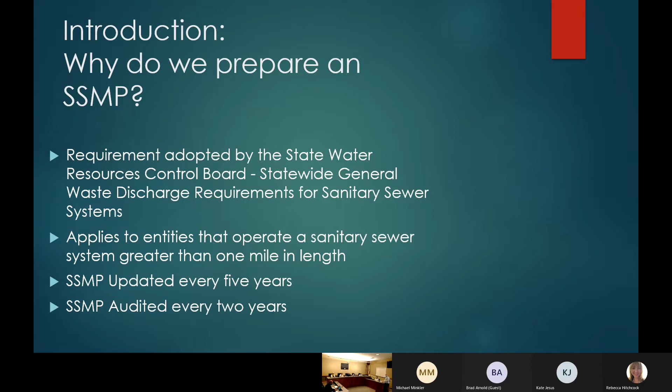Some of the processes we recently implemented and incorporated into this 2020 update were, if you could advance the next slide please, Becca. We implemented mobile MMS and updated the mission statement, the vision statement, and made all updates to incorporate the new construction maintenance manager position and all contact information for field staff and operations. We also had a new collection system supervisor during this past couple of years.

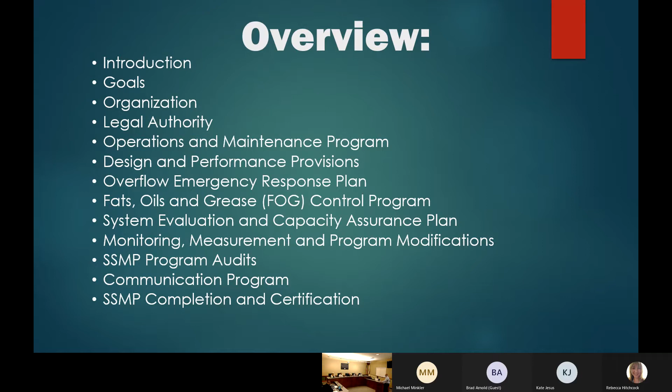If you could advance the next slide, and those are the updates. If you could advance one more. Thank you. So here's a graphic, you guys can see a couple slides into the presentation, the mobile MMS update. Now our collections crew can incorporate all of their work efforts onto a schedule in the computer maintenance management system, and it'll spit out any work orders they need to complete during the year, quarterly, monthly, and so on. There's a depiction of the collection system and the water system in mobile MMS.

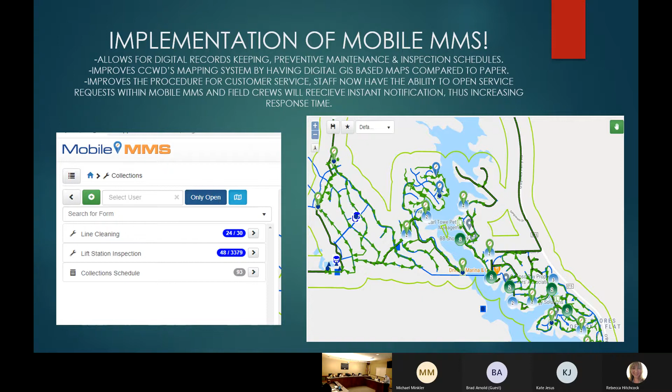And if you could advance the next slide, thank you. We also incorporated the fact that we now have 2 cleaning trailers. One's brand new, we refurbished the second. Next slide. And we also incorporated the new GapVax into the SSMP.

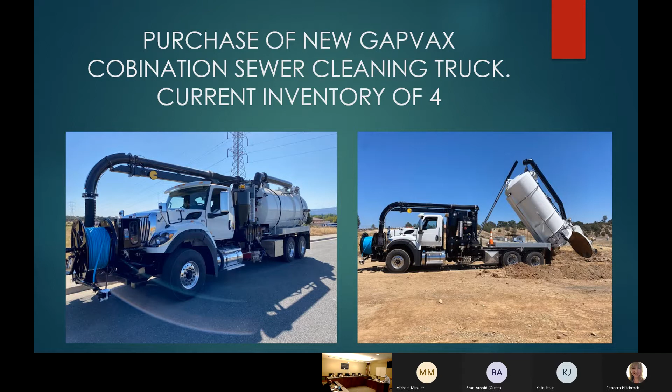And we discussed smoke testing, which you've seen some of these pictures before.

These are, if you recall, Douglas Flat Vallecito. So we push heated vegetable oil through the collection system.

And then we go find any areas of exposure where we see that there's openings into the sewage system, sources of inflow and infiltration. And then we go ahead and cap and patch those.

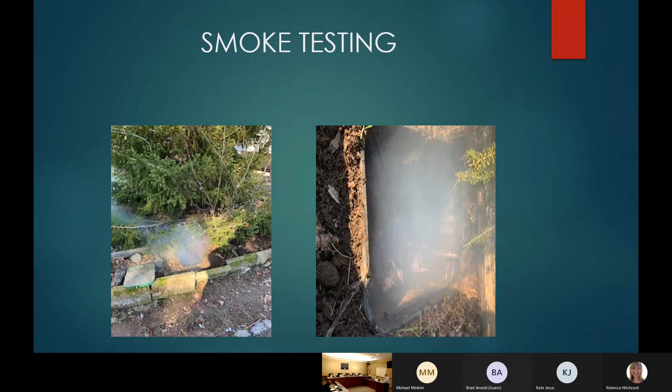It's really effective. The key to smoke testing is to have an effective public notification system ahead of time, because you can really raise a lot of flags if they see smoke coming out of the ground all over the place, right? And so this picture, I always love this one.

Picture on the left is of our collection system supervisor, Amos, holding what everybody affectionately calls a Yeti, which is a giant hairball.

That has taken the shape of a pipe and has been pulled out. So the SSMP is really designed to resolve issues like this that occur over time.

So staff's recommendation is that the board go ahead and approve this 2-year audit and update for the SSMP.

What is it called? Did you say a hairball? Well, we call it a Yeti. Yeti? Yes, YETI, correct. So when you hear the collections crew talk about all the Yetis they've pulled out of the system over the past couple weeks, now you know what they're referring to.

Oh, I think, yeah, it could be. Yeah, it could be just after lunch, you know. I'll bet it's not only hair in there.

Is there any way that, you guys are always talking about redwood tanks, maybe we could sell this for like extensions? Yeah, that's a good point. We can develop our own line of wigs. Yeah, oh yeah, there you go.

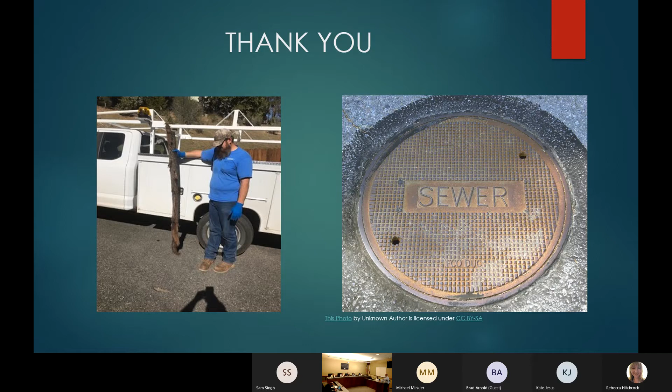Got it. Because the resale on those things can't be very good, since everybody else has the same problem with them. But if we can keep them in the yard, then maybe we can save a couple bucks. Good point. Are we banking on that money from a sale already?

Not with these 2 vehicles. They've been used quite well. Yeah, that makes sense. Got it.

All right, anything else on this item? We have a motion and a second. Is there any public comment? Okay, all those in favor state aye. Opposed? Okay, thank you. Damon.

5B, discussion and action regarding credit adjustment for APN 3510. Jessica: Good afternoon. We currently have a customer located at 5831 Highway 4 who is requesting a credit adjustment for the amount of $1,000.33, due to a leak on their property through no fault of their own. Per the district's ordinance, any leak adjustment over $1,000 requires board approval. This customer has not received an adjustment in the last 5 years and is in good standing, so we recommend that the board approves.

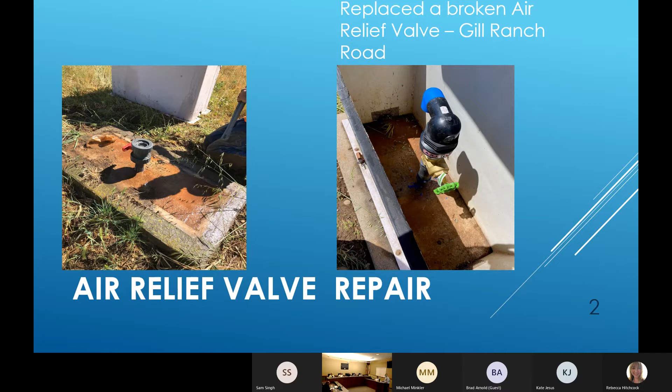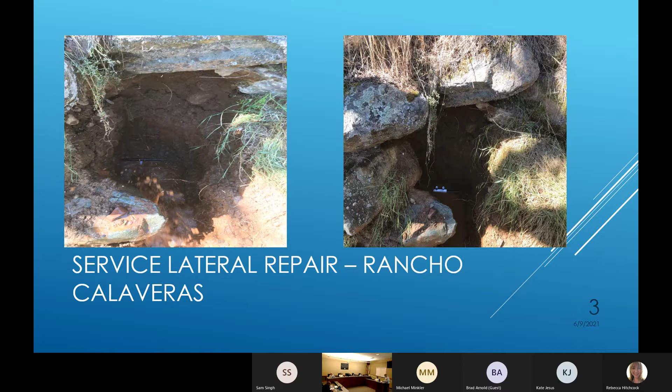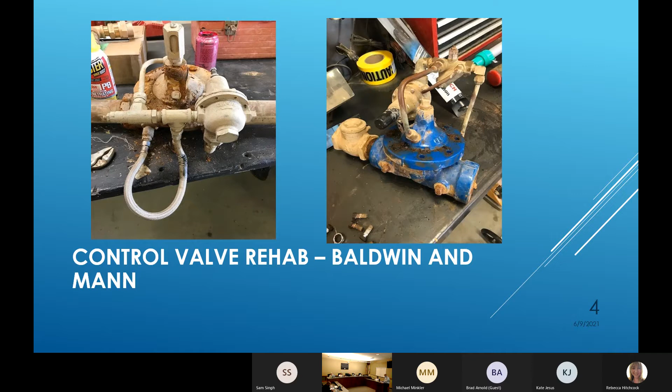This is an interesting one. Last month I showed you pictures of the rehabilitation of a pressure reducing valve vault on Baldwin and Mann. This is the small control valve — you have a high flow line, a 6-inch or 4-inch line, usually 6, and a low flow, the 2-inch line. This is the control valve for the 2-inch. Staff pulled the old one out, on the left, cleaned it up, shown on the right, and then started to replace parts.

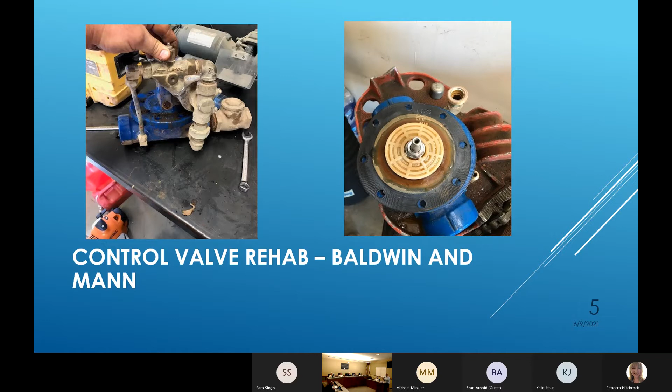On the next slide, the picture on the left is basically a pilot control system. They're mocking it up onto the cleaned valve to determine whether they need to replace it or put in a new one. Something you don't often get to see is on the right — the bonnet taken off that small control valve. You see a diaphragm, a gasket we call it, the black rubber on the outside, and in the middle is the actual seat of the valve, the valve itself. That valve floats on a riser and the water pushes underneath that gasket, controlled by the pilot controls.

So when you have a failure — the image on the left shows when there's a hole in that gasket, you get equalized pressure on either side of the valve. That's how a pressure reducing valve can fail: an area of high pressure is equalized because there's a hole in the diaphragm, so that separation no longer exists and pressure flows from one side to the other. That's when you all get phone calls from customers saying their water heater is blowing up. The image on the right shows all the pilot controls replaced, the valve rebuilt, and ready to be placed back into service.

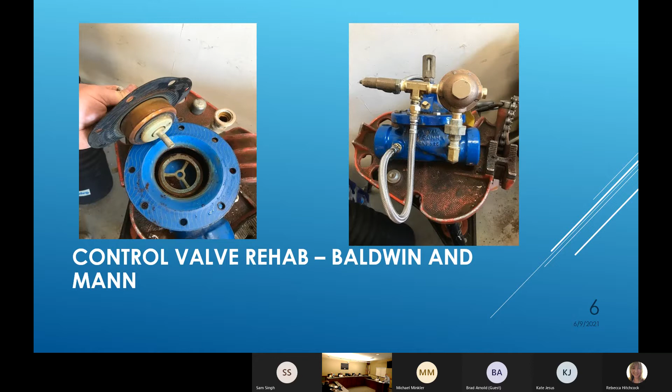You can see on this image we have a new service line install on Bergsma. We are still installing new lines throughout the system in a lot of service areas.

This is a really neat project that's recently been implemented at Copper Cove.

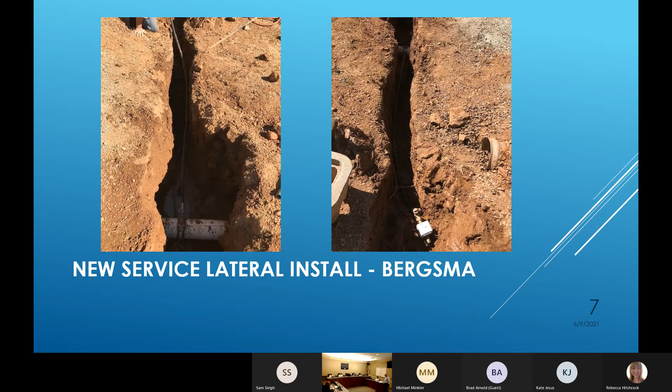Damon, I have a question — back on the new service lateral install. If that's a new service line, did you do a hot tap on that pipe? We can, yeah. I'm not sure if they left the pipe in service when they tapped this one or if they actually shut it down. But what's interesting, Director Thomas, if you look at the picture on the right, the little white box, that's the water meter. Yeah, those are the new AMI — just that little box, a straight pipe underneath it with a box with a magnetic flow indicator in there. The fact that you can see it with dirt around it is because the box is actually over to the left.

On slide number 8, you can see this is the SCADA system upgrade to the Copper Cove water and wastewater system. The system on the left has been in since the early 2000s — it's called Wonderware, basically the interface for operations and collection staff to the infrastructure in the field. The image on the right is what's called Ignition, covering all the wastewater lift stations in Copper Cove.

And so you can look at those at a glance and you can see flow, you can see the volume, you can see which pumps are on or off, and you can see how they flow within and throughout each other.

If you move to the next slide, Becca, you can see this is one aspect of the water treatment system. You can see the original design flow path on the left, and then the newer one on the right, which is more accurate. You can actually see how water flows from Lake Tulloch into the two ozonation towers, through the filters, and out into distribution.

Next slide. And here's just another image of an overview screen for Copper. Operations staff are really happy with it. It's very user friendly and it provides a lot more components that staff can take a look at a glance.

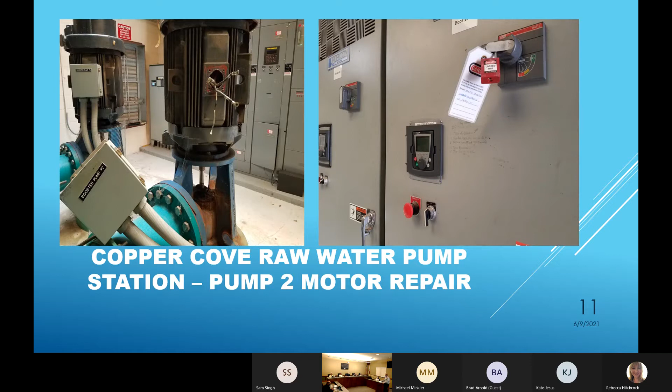Damon, back to that software, the SCADA software. Do we have to, is it licensed at every single computer or every single location? Or how does that work? I mean, it seems like when you buy new software, you can use it where you want to. But what is the licensing for this, how is that set up?

So with Ignition, which is the new software, we can all access it. You could have a session, right? You could be in there looking at, oh, let me check this tank and let me check this level and check the flow rate. And I could then log in and you wouldn't know it. We could have multiple sessions going on. Ignition's very accepting like that. Wonderware, which is kind of the old guard so to speak, we only have one license for each system.

So if you were in there trying to make adjustments and checking flow, like, hey, I'm going to adjust the chlorine here and watch it for 5 minutes and see what it does, and I jumped in and was like, man, I wonder what's going on over there in Scott's plant, all of a sudden you'd see the mouse move and see me change the screen, and you'd be like, what are you doing? And you'd text, hey, is that you? No, it's Damon over here. So this provides a lot more flexibility.

I was more asking about different locations. Once you buy the software in Copperopolis, you can't use it in Jenny Lind? Well, right, so it's somewhat site specific software that you buy components for. For Ignition, we're going to sell you this site for Copper because it has two filters, it has a certain amount of effluent pumps, and we're going to give you a price based on the infrastructure there that we have to monitor. So that's always going to be different at each facility.

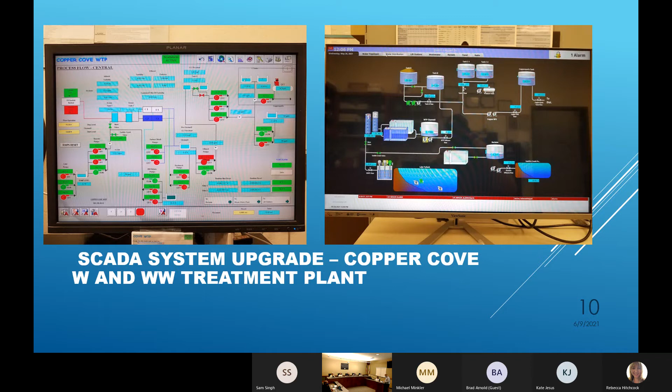At some point in time we need to get the hologram where we can move it out of the way. It's on the wish list. Yeah, that's next budget. It's very cool.

Trending, I think Wonderware does that too. Trending is another key component of those systems where, when you're troubleshooting, you can look back in time at where each of those levels have been and recreate historically what happened.

Wonderware sounds like women's wear. An undergarment?

At our last meeting there was a question of whether our mechanics reuse truck beds and service bodies. This is an image showing the mechanical staff taking a service body off an old truck and putting it on a truck that might not be as old, but runs a heck of a lot better.

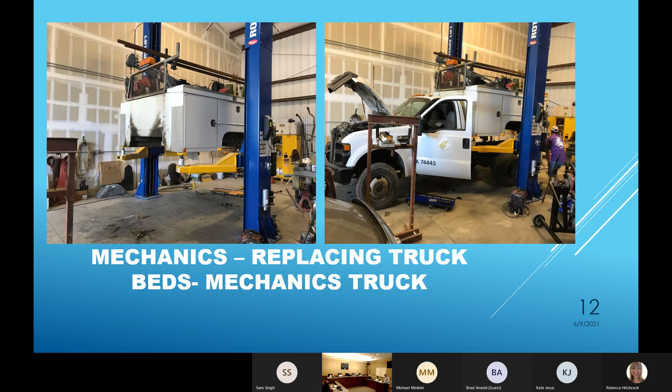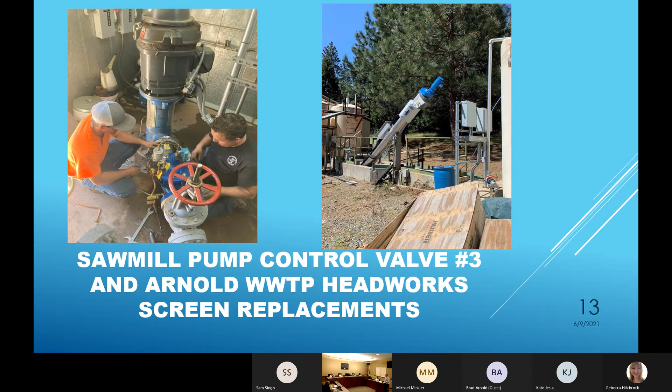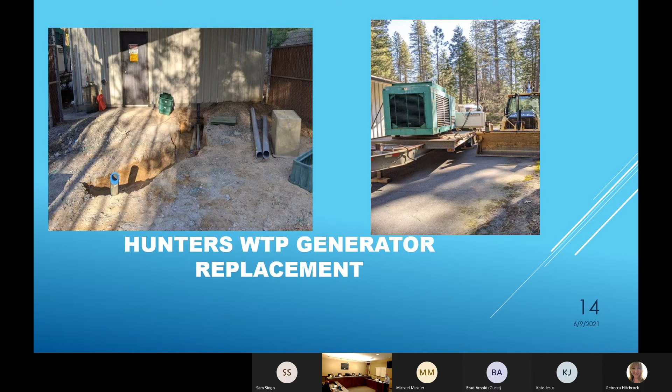The next few pictures illustrate the construction crew's effort to replace the 29-year-old 270 kW generator at the Hunters Water Plant with a nearly new 550 kW generator. You can see where the old generator used to live on the left, and the grading done by the Mini-X on the right.

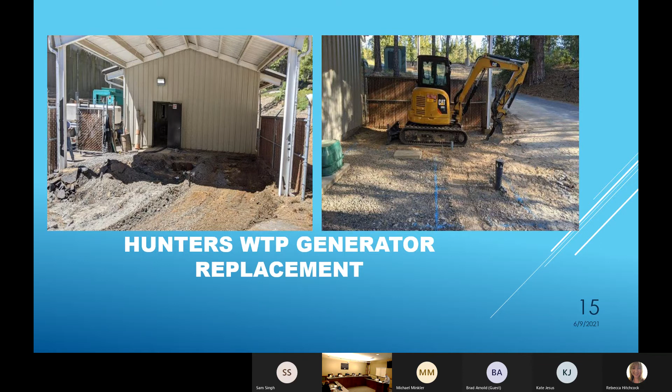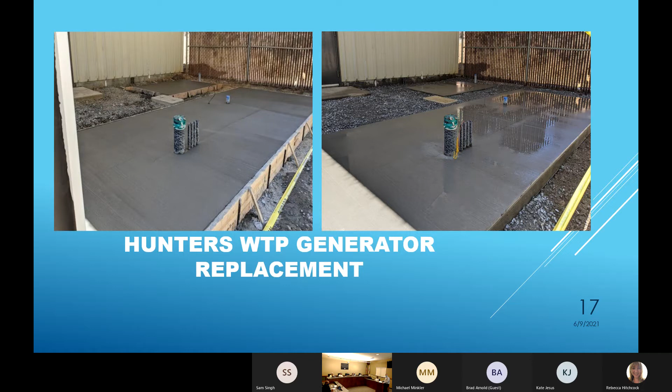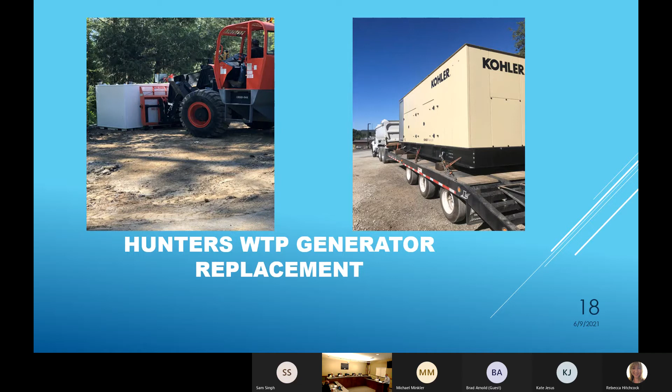If you could advance to the next slide, Becca. Crews poured a slab, ran the electrical in there, poured a slab for the fuel tank and a slab for the generator, and there they are after being nicely screeded. Next picture: here's an image of a crane moving the diesel tank to set it, and then the generator arriving on the trailer.

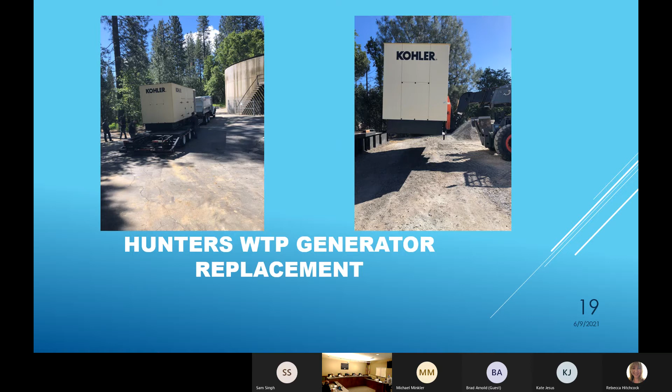We tested it fully. For the last many years, when the power would fail at Hunter's, we didn't have full operation of the treatment facility — we had to make sure these pumps didn't turn on because it would be an excessive power draw. Now we can run the whole plant.

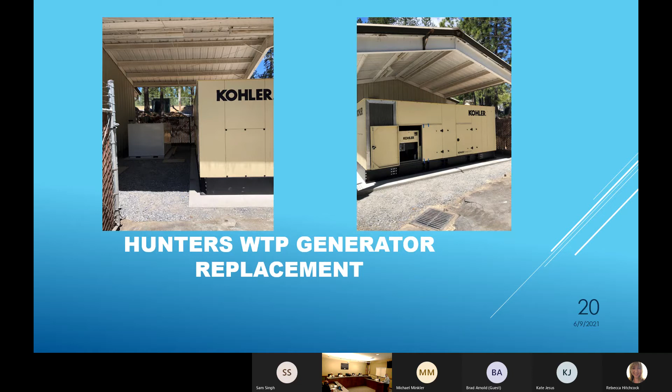I can just imagine our field forces are really anxious to work with all this new stuff. This was a project where the construction crew, mechanical, and electrical all worked together to set this generator. I think they're very proud of it — they did a great job, looks really good.

Is that a Convault storage container? Yes. And the gallons, looks like it — that one's 1,000 gallons, and we also have another 1,000 gallon tank on site, because this generator, when it's running at a load, is sucking fuel big time.

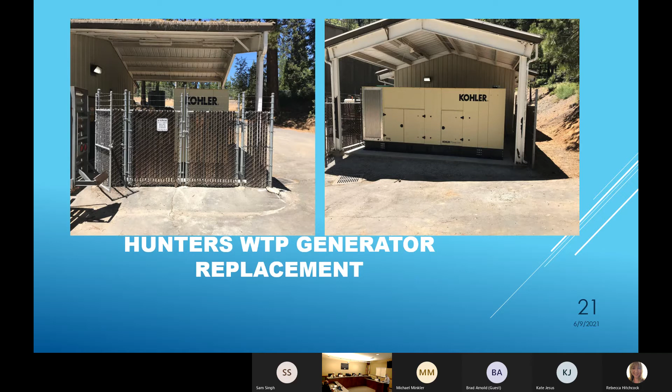Very nice. All right, anything else, any other questions? That's it. All right, wonderful, thank you, Damon, thank you so much, and good stuff in your field — I'll relay it.

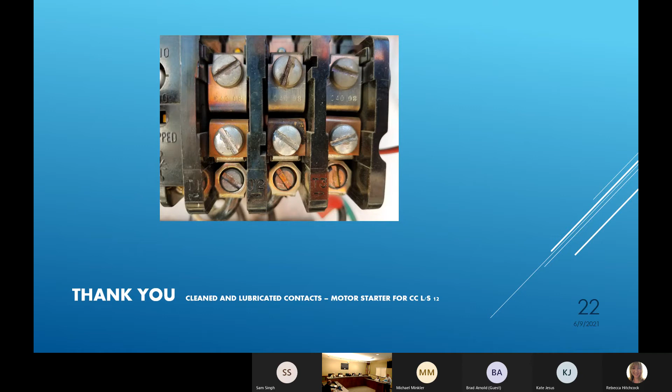All right, just a few items. I'm glad Damon really highlighted that Hunter's generator. There's a lot of good stuff going on, but that one in particular is a complex project, and really hats off to the expertise and skill level of our crew to pull that off in-house.

Cost savings for the district and better functionality, and that's after being very creative and even locating that generator. It was not used, it was new, but it had been purchased by somebody else for a different application, then they realized they didn't need it. So we got it at a discount, a good deal. The whole thing from beginning to end is just a really successful project. I think we're gonna put a press release out on that one too, something the community should know about.

Couple quick updates since the last board meeting. Went to Dave Hicks' retirement party a couple Fridays ago, which was a great event. A few of us went. Dave's been a good partner for us, so sad to see him go, but already working with Tyler Mayo, his replacement up there at Blue Lake Springs. I anticipate the good working relationship continuing into the future.

We're also working with CPUD on what I think will be a new agreement, not an amendment. It's essentially our backup water supply for West Point that we purchased from CPUD. We call it a backup supply, but we rely on it - I don't want to trivialize it, because some years, when it's really wet and Bear Creek is running enough, we don't need it. But there are a lot of years where we use at least some water, and some years a lot of water, directly out of the Mokelumne. That agreement is really critical. Director Ratterman and Director Secada have been in the loop on that one and helping get us to the finish line. I anticipate that being before the board on the 23rd, the next regular meeting in June, for approval - a water supply agreement for 200 acre feet out of the Mokelumne from CPUD.